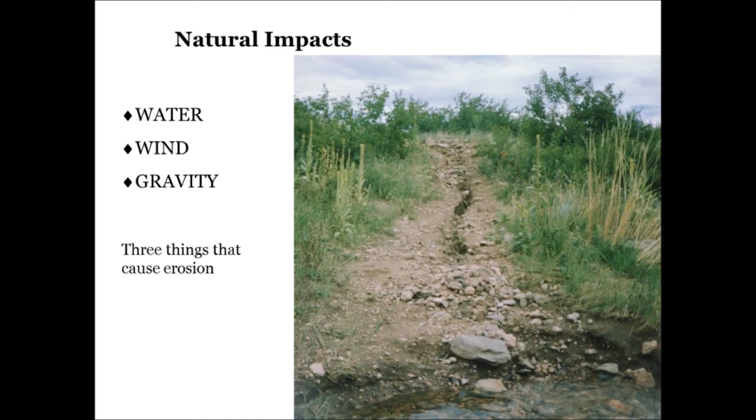If you took these things out of the picture, the only way materials would be removed from the trail would be on the bottom of our horses' hooves, on bicycle tires, or hikers' boots. So erosion is caused by wind, water, and gravity. This is known as natural impact. On the other side of the coin, we have what is known as user impacts. And these are the issues that we create on trails when we go out and use them.

Most of the time when I've been on horseback on something like this, the horse isn't real keen about walking right through the middle of the mud. So they tend to try to walk off to the side, and the impact that causes is a widening of the trail. So not only does the problem exist on the original trail, but it gets wider and wider as the impact problem grows. So these are our two main types of impact. We've got natural impact in the form of wind, water, and gravity, and user impact in the form of us walking or riding on trails when they're soft, loosening up materials, post holing, or going around obstacles.

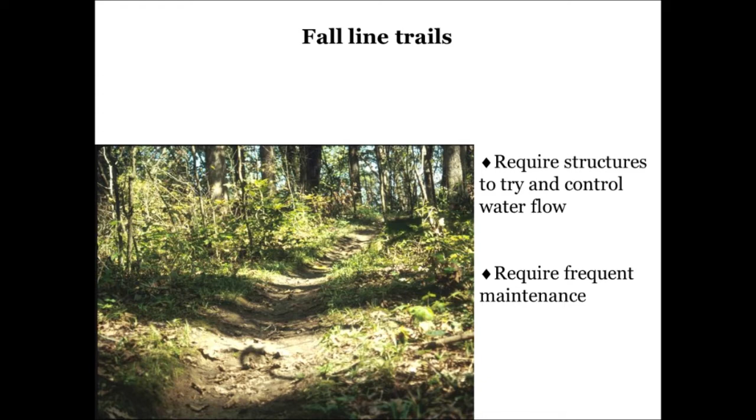So you're out there spending a lot of time trying to maintain what is essentially considered an unmaintainable grade. By changing the design, changing the way we think about trails and placing them on the contour, all of a sudden everything changes. Now, when the water runs down the hill and encounters our trail, it's going to cross the trail at nearly right angles. It doesn't build any more volume or velocity than it had before it encountered the trail. Since it's not running down the trail, it's not going to remove any of the materials loosened up by anybody using the trail. So essentially, our trail is not eroding any faster than the hillside around it.

All right. Those of you that do maintenance on trails or are interested in doing it, this type of design really takes a lot of work out of the trails. If you're not having to manage water or natural impact on your trails, it really cuts down on a lot of the maintenance. The trails end up laying a lot more naturally on the land. And the really neat thing about that is the trails tend to be a lot more aesthetic.

If you really think about it, how often do you see perfectly straight lines in nature? I imagine it's not too often. So if your trail runs in a straight line, it ends up being fairly unnatural, and that's what you end up with a lot of times when you have trails on the fall line. Take that same trail, put it on the contour. Now it's following the natural curves and undulations of the landscape that it crosses and sits a lot more naturally on the property.

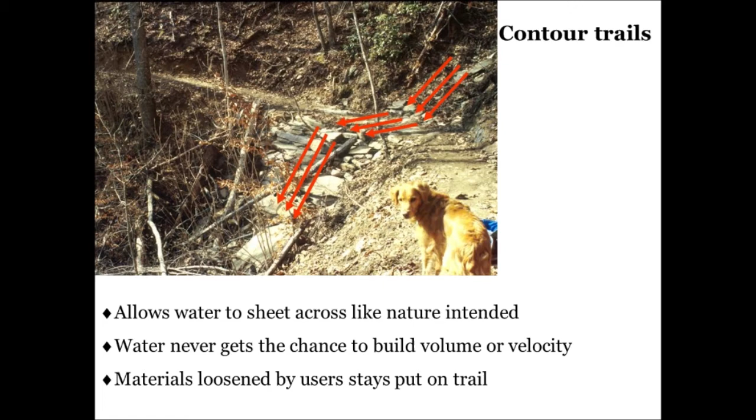Okay, we're going to continue on into a little bit of trail design, and what I really want to talk about here are the rules of the trail. What I've done here is created a slide that shows the first rule. Now, people may wonder where these rules came from. When I worked for the International Mountain Bicycling Association, we were fortunate enough to travel the entire United States and 7 different countries in Europe. And it was really quite an education.

You know, when we went out the first year, I had really learned a lot about soil types and how to deal with soils and problems that we have here in the Southeast. I'm from Georgia.

This is where we do most of the work on our trails. But you can imagine when I got out to, say, coastal California, Utah, the Pacific Northwest, places like that, we're not in Georgia anymore. It becomes a completely different scenario, and the ways to deal with the problems were completely different. So I really listened when I was in these places that I was unfamiliar with, and everywhere we went, there were people just like us that had figured out how to deal with their particular situations in their particular soil types, rainfall amounts, different types of use, different amounts of use.

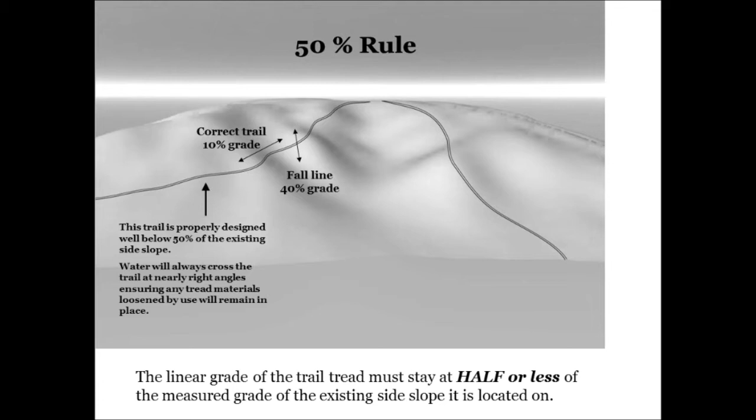When I first came up with this theory, it was a little confusing to me too, because there's a lot of different angles involved here. But I'm going to try to explain it as simply as I can, which is the way I understand most things. What it means is the grade of the trail itself has to stay at half or less of what the actual hillside measures looking straight down the fall line.

Remember, I was talking just a few minutes ago about fall line trails, and I probably should have taken the time at that point to explain that a fall line trail means straight down the hill. If you had a hill that had no features on it whatsoever, perfectly smooth, almost like a road going straight down a hill, and you were to drop a bowling ball at the top of that hill, it would roll down the path of least resistance, which is straight down the hill. That's how gravity is going to pull it. That's what's known as the fall line. So looking straight down the fall line, our trail grade has to stay at half of that.

Okay? What that's going to accomplish is it's going to allow the water to cross our trail at nearly right angles. So that's what's going to keep it from building that volume and velocity, maintain that sheeting action, and not wash out our trail or even remove the material that was loosened up by people using it.

Here's a good example on the screen itself. Here we have a 40% fall line grade. So if we look straight down the hill, it's 40%. The trail itself is running at a 10% grade. Half of 40% is 20%. Our trail is well under that half mark, and so that's going to ensure that when water runs down that hill, it's not going to run down our trail, and therefore our trail is not going to wash out. So it's going to be sustainable.

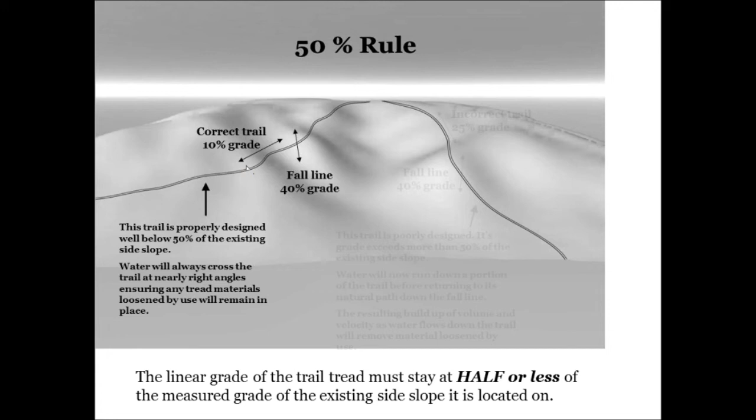The other side of the coin, where I've got a similar trail drawn on the right-hand side of the screen, shows that same 40% fall line, but now our trail is running at a 25% grade, which is a little bit more than half of our hillside. All right, and here's where we start to get into trouble.

Now, as the water runs down the hillside, it's going to get on our trail. And because that trail is the path of least resistance, water's going to start to run down that trail. As it starts to run down that smooth, compacted trail tread, it's going to build volume and velocity and start to remove that material that's been loosened up by users.

This is the point when most people will start putting in water bars when their trail's breaking the 50% rule. Now at least you have some place to drain the water to. But even at that point, basically what's happening is your trail design is wrong. You've broken the 50% rule, and now you're paying the price in increased trail maintenance. Okay, so I hope that makes sense to everybody. Keep in mind the 50% rule deals with our natural impact. This is what is going to keep the water off of the trail.

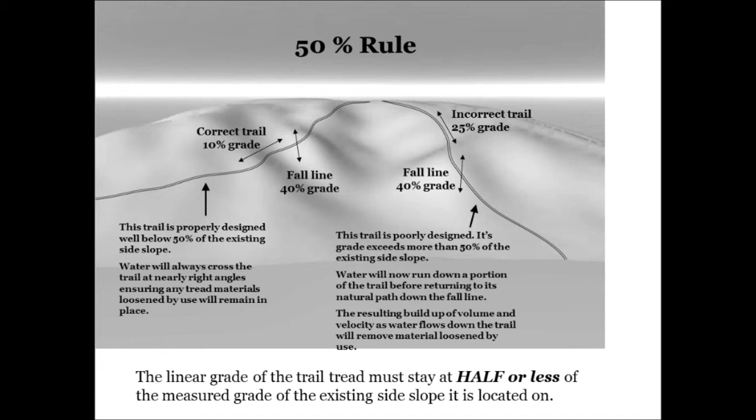So if you have a trail that is going to exist in a high-use urban area, and this is where people are using the trail every single day in large amounts, weekends, the parking lot is completely full, and you've got a tremendous amount of use on your trail, we're looking at maximum average grades. Now, keep in mind, I'm saying average here. In other words, that doesn't mean your trail can't go over a 3 or a 5% grade.

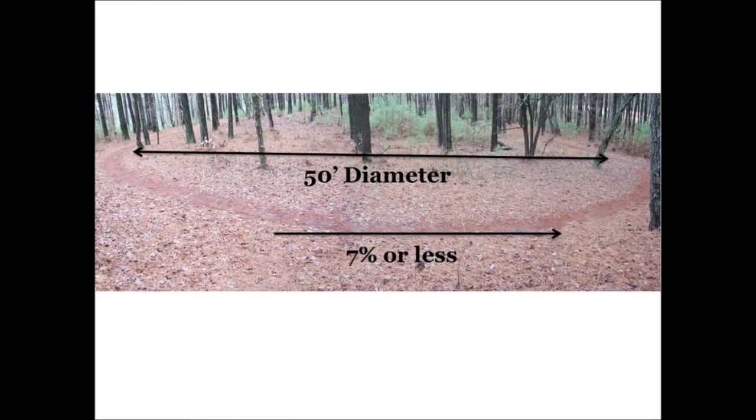So since 1995, that trail has needed almost no maintenance at all, even though it sees both bicycle and equestrian use. And with its proximity to urban Atlanta, it sees a tremendous amount of use. So it's a really sustainable design. If you have to make a turn across a hillside and you can find a shallow grade like this to make that turn and have the room, I highly recommend using something like this over a switchback or another structure that either might fail or cause a lot of maintenance down the road.

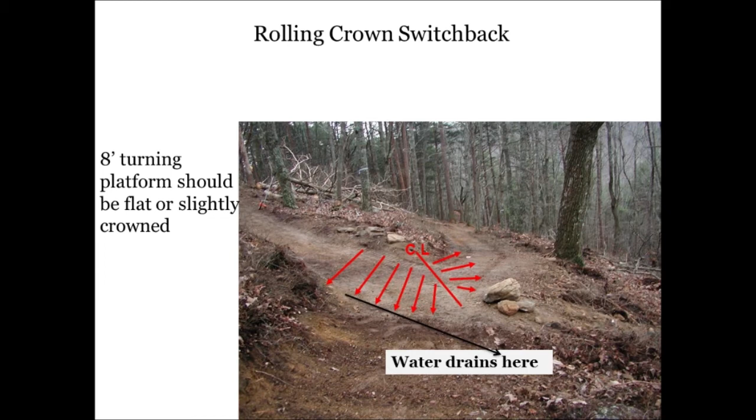Okay, now we can talk a little bit about trail development. Whenever you're building a trail or maintaining an existing trail, you should always maintain it to what we call a full bench cut construction. Okay, what that means is that your trail is fully cut from the inside edge to the outside edge. There's no fill material used in this trail at all. What that's going to do is give you a very stable trail tread across the entire width of the trail. So if your horse is walking in the center of the trail, it's just as durable out by the edge or by the inside edge as it is in the center.

And so that means that the trail is not going to break down. You're not going to get terraces along the trail tread, or you're not going to have as much of a problem with post holing, and the water will be able to sheet across the trail tread, and your trail will dry out very quickly after a heavy rain event, and so you won't have to wait as long after a heavy rain event, nor will you have nearly as much impact on it.

So if you have existing trails that you do maintenance on that were cut a long time ago and maybe the edge was filled in, when you go out to work on them, take a little bit of time and dig that trail in a little bit better and make sure that there's no fill material, that it's benched all the way across, from left to right across the trail tread. And you'll be amazed at the difference it makes to how durable your trail tread is.

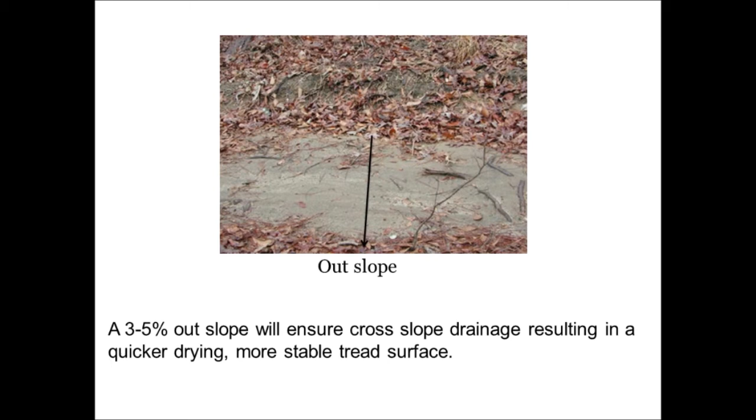Just to give you a good example, I typically run a crew of 2 to 3 people per machine on something like this. That crew with just 2 or 3 people and a competent operator on the machine can build on average anywhere from 300 to 800 feet of trail a day. Now that's not just roughed in, that's cleared, constructed, and finished completely in a single day.

So it really makes a big difference on how we build trails. The wonderful thing about it is it can still build narrow, natural surface trails, or what most of us consider single track. We don't have to go in and construct the trails as a road or something like that to accomplish the type of experience that we all enjoy when we're out riding through the woods or riding across a meadow or something like that. So very effective machinery, and it doesn't have to be real big.

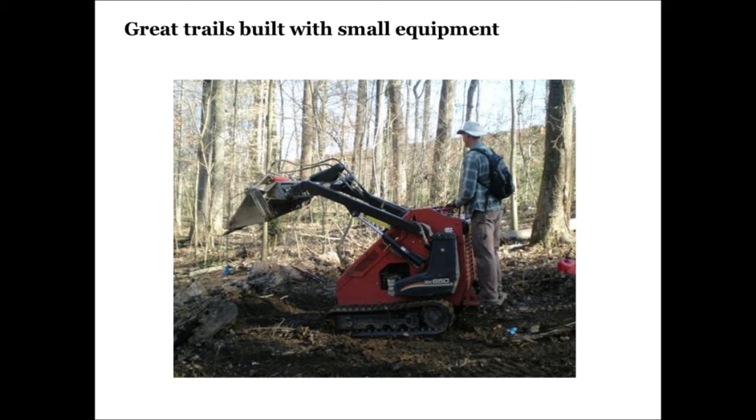In some climates or some soil types, especially in coastal areas, you may get into a situation where you just don't have enough binders in the soil. And what I'm talking about when I say binders are clay. You don't have enough clay in the soil, and as soon as you start riding on it, it starts to fall apart. It gets really deep, loose, and it's just really unpleasant to try to use as a trail surface. So we get into a few things that we call trail hardening materials. One of those that we use is gravel.

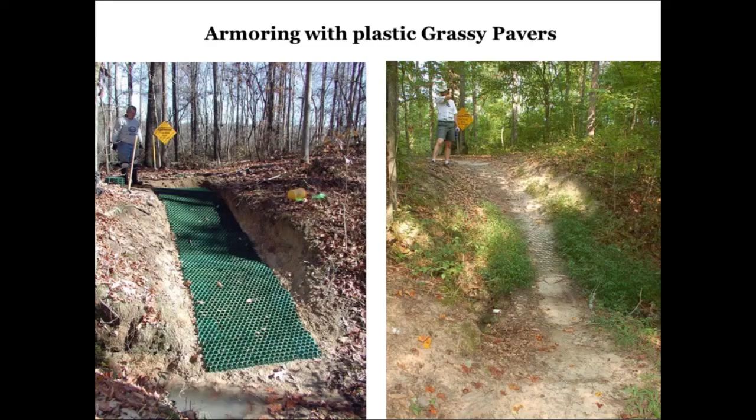Another alternative surfacing material that we've used very effectively, especially around stream crossings to harden the banks on either side, are Grassy Pavers. Once again, this is a section of trail we did out at the Georgia International Horse Park. We had a crossing here that every time it rained, it would get wet. You can see a little bit of water standing down here. So what we wanted to do was harden up the banks on either side to make sure siltation wasn't an issue and that we weren't continuing to erode this bank as use went up and down it.

We put together these Grassy Pavers and kind of graded this out smooth, and then as we finished the back cuts, just like you see over here on this side, we just pulled this loose sand down into the pavers, and packed it down with the hand tools to hold it together. And the really neat thing about that is I wasn't sure if it was going to work the first time we did it. I put the digital level on this and measured the grade. It's a 22% grade coming up out of the stream there. So it's really kind of steep.

Traction was not really good. The sand was really soft. You can see how eroded out and bent over the years, and it was really quite a mess. The picture on the right-hand side here shows those same grassy pavers 7 years later. Over 7 years, we lost less than 1/4 inch of material out of the bottom 4 feet of this.

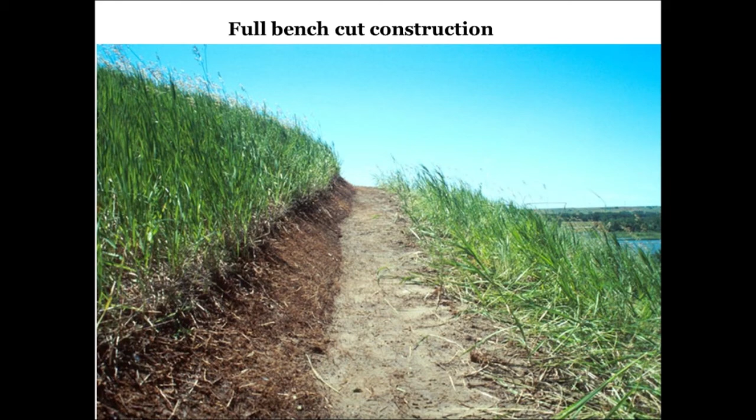Yvette asks, the section of trail with the Grassy Pavers, how long was that section of trail? That section that I showed on there was 30 feet. The longest section I have done is over 200 feet. And everything that I've ever done has always held up. Okay, and there's a follow-up question to that from Barbara Oslin. She says, Mike, have you had feedback on the pavers being too slick for horses' hooves, especially when wet from crossing streams? What's the best way to keep a soil cover anchored?

I'm glad you brought that up, Barb. I forgot to mention that the top edge of the paver, where you would contact it with your horse's hooves, is actually serrated. It's not sharp serrated like it would cut you if you were barefoot, but it's got these raised bumps on it, and the traction on it is exceptional. That's good. I'm seeing some more of the questions popping up now. It looks like they've been in limbo here for a while. Yvette asked, when you were talking about the rolling grades, did you build in rolling grades on those sections of trails?

I will comment on it in regard to the Grassy Pavers, and typically no, we don't put grade dips on the areas where we're putting in the Grassy Pavers. Now, on that one I just mentioned that was a lot longer, I did put in a grade dip above it and a grade dip below it, just as a safety valve, but I don't feel that it was entirely necessary. The beauty of the Grassy Pavers themselves is they hold the material that you put in them together so well that water can literally gush down these things and not create that much of an issue.